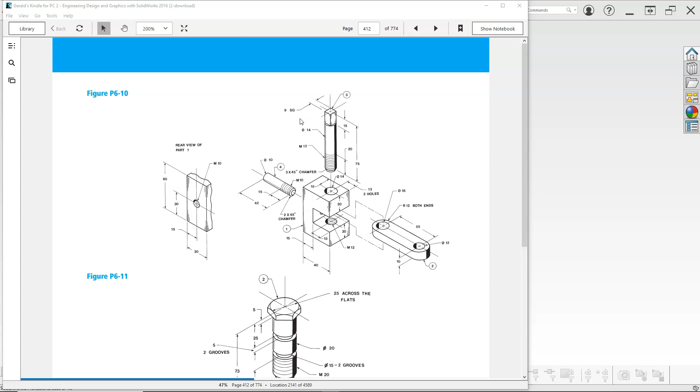Top down, justification for doing a top down might be that this is the first of about 20 sizes, and then I'm going to use top down as maybe a calculator or some type of useful geometry. So let's start with the C shape.

No real issues with our geometry, and this is in metric. So I believe we've created a metric template. If not, I will refer you back to creating the templates. So let's go ahead and we'll get started. I'm going to just go to the front plane.

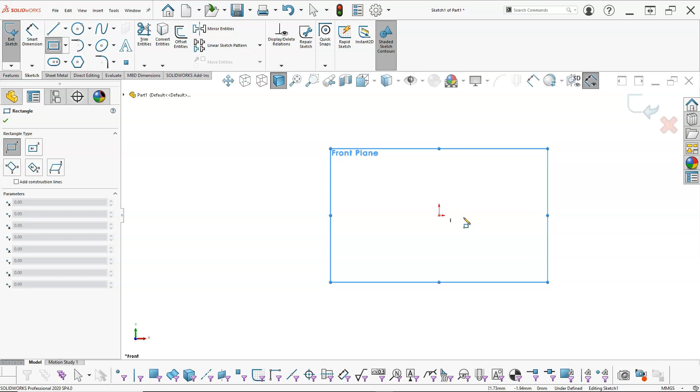There is some symmetry. I don't know as far as location what I'm really going to be doing with this. There's not really a mounting point or something to be concerned with. So I'm going to go with the corner rectangle, and we're going to attach it to the origin. And if I do the click, then I'm just going to bring it out to that side.

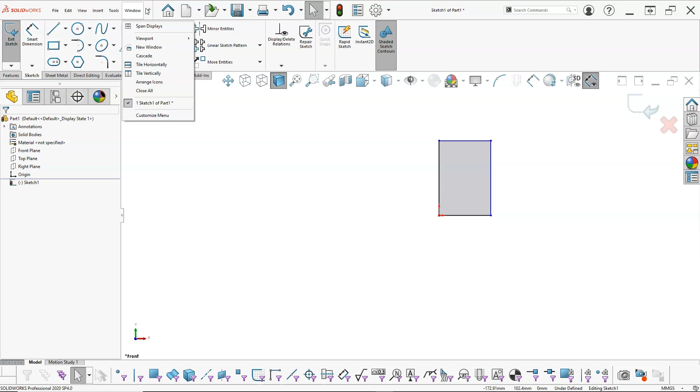So there's a tool under Sketch Tools. So going over to the Tools pull down, and if you haven't hit the little push pin, if you see the little arrow over here next to SolidWorks, you're going to expand out, hit the push pin, because I do kind of like to have those available.

And then under Sketch Tools, there's a tool called Jog Line. I don't get to use that very much, but it is kind of handy at times where when you pick on the line, it's going to start to drag out and create that shape. Now I could have just as easily have sketched all of that, and it really wouldn't have been that big of a deal.

So our decision, we have 20 on the top on the 2 legs, the top and the bottom, and the gap. I got to find my overall. So 20 and 20, and we're not really given an overall. So the assumption would be that this is going to slide in and be fairly close. So if we're looking at a gap tolerance, we could go to the dimension of 10.

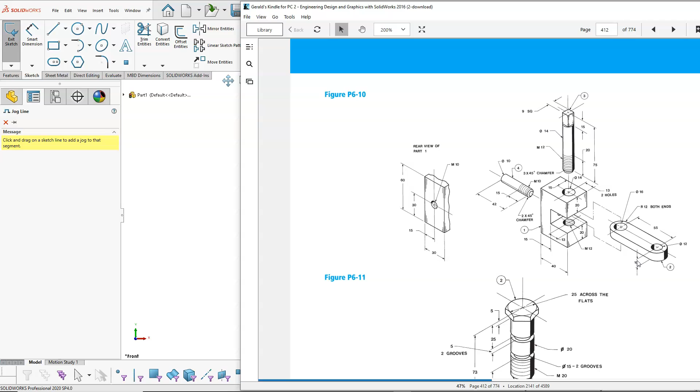So that would be another one of those we'd want to verify against an actual part, or look at our downstream data of what this ultimately is going to do. So that's going to drive some of my dimension choices. And let's see, we are still in the jog line. I'm trying to figure out why I'm not getting my end context.

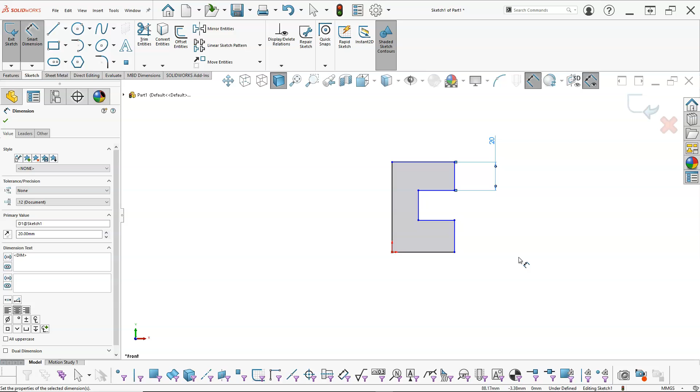Alright, so we're in the smart dimension. And one more. Let's see if this is coming up now. No, I'm not seeing. I noticed another dimension strategy, but that may have been something that we're going to review in 2021 SolidWorks. So I'm just going to do the stack up, and that way if this needs to change, they can be individual. I'm not worried about it kind of squishing there.

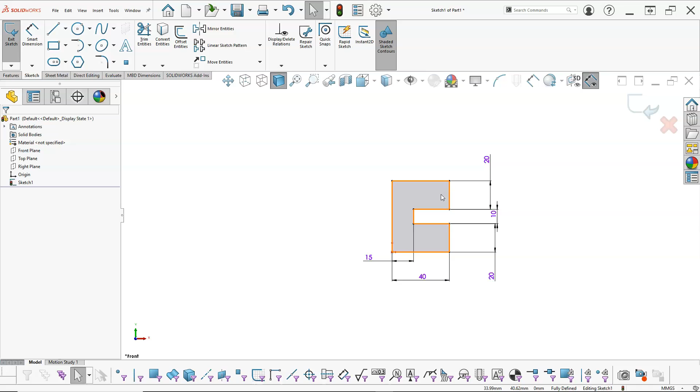So we have an overall of 40, and our depth, well, to the center of the hole, there we go, 15. And that gives us our gap. Now their gap looks a little bit wider, like it would be 20, but since it's not called out, or I'm not seeing it, I have to make a decision about the actual functionality of this part.

So let's go over into the features, extrude, and I would like for this to stay centered, so I'm going to go to mid plane. You can use blind end condition taking it backwards or forwards, pretty much whatever your preference. We have an overall width.

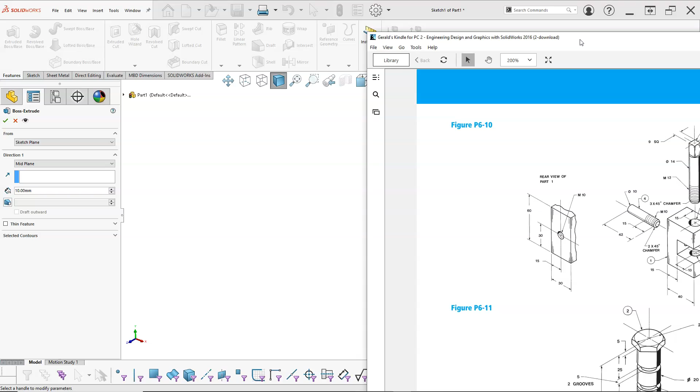Well, again, I don't see that dimension, but since the hole is at 15 millimeters, we can probably, maybe on the back of the part, the rear view has the 30, and then 30 to the top. So, and there's my 60. So that answered that question. So they hit it. So still in the command, so I can't make that change. And double click so that everything's highlighted. When I hit the 30, hit enter, that's going to go with the group.

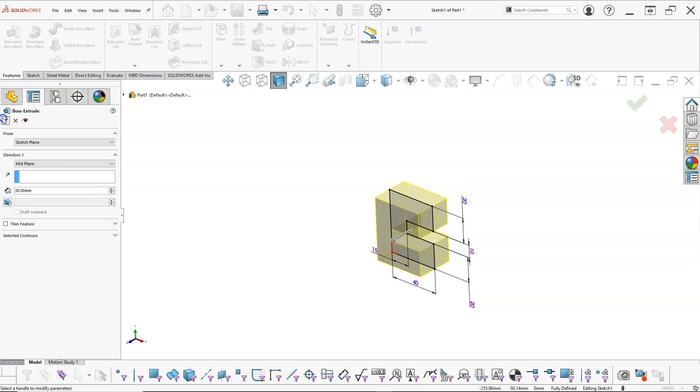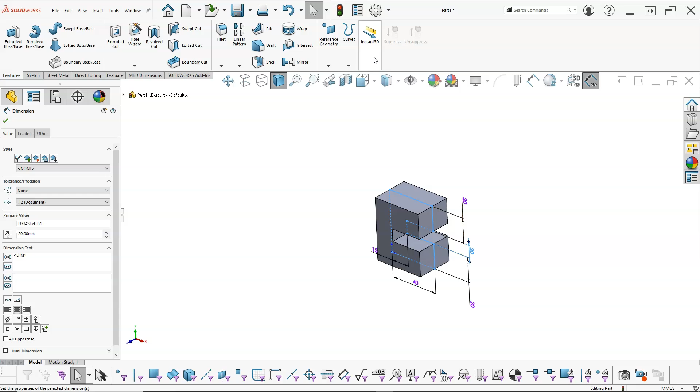So we verified, came to the view that had the correct dimension in it. So that would probably not be good at 60, but if we do want to change it, I need to double click on the dimension, put in the correct value, and then we'll perform a rebuild. That'll allow it to adjust. Alright, so our next piece of geometry, let's go with the top, and I'll use the hole wizard, so S key.

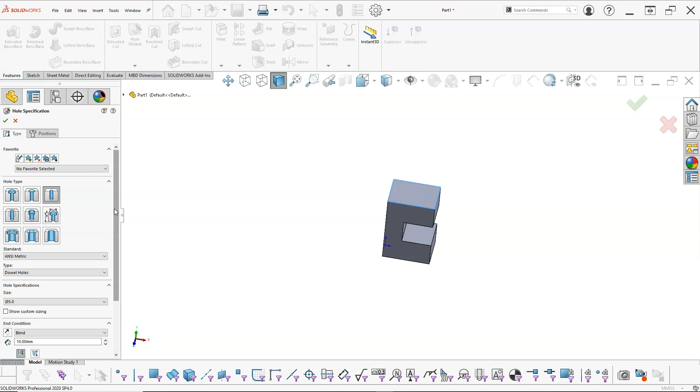And I really should get in the habit of using the S key more, but there's also that trade-off of finding out where the other items are.

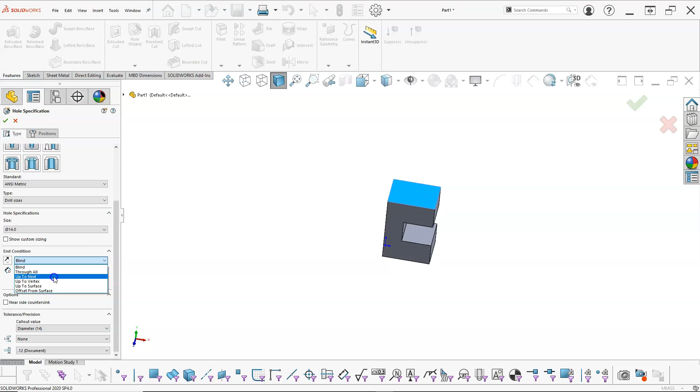So we're going to go with a 14 millimeter drill size, and we'll scroll down to 14, and its condition can be up to next, so it will stop at this next face.

Alright, and since I pre-selected, I should not see a 3D sketch. Now rotate it over into the sketch. I'll just rotate a little bit so I can make sure I have the correct perspective. 13 millimeters off of the front face.

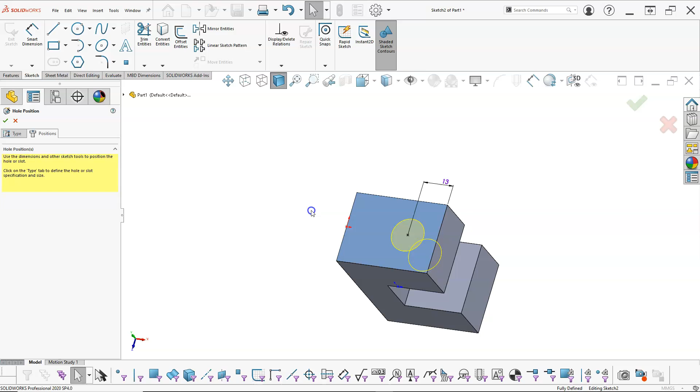And since it's centered, if I always want it to be centered rather than placing a dimension, I'll pick the point and then control select the origin or the midpoint, and we'll make those horizontal. Again, long leg is horizontal, short leg is vertical. That's how we'll create our position.

For the threaded hole on the bottom that makes the intersection, let's go ahead back into the hole wizard. And this shows as an M12, so we'll pick a common thread form, metric, tapped hole. Let's go ahead and scroll down a little bit.

And as these numbers get bigger, remember that the second number is the pitch. So a 1.25 is a finer thread than a 1.75. So for what this is doing, I think we would be safe with a coarser thread, so 1.5 or 1.75. I think 1.75 is fairly common.

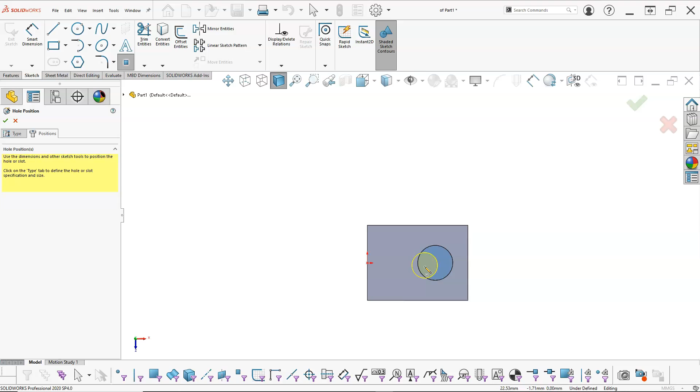Tap drills and diameters, thread call out. We can add the thread class, which would be the ANSI 2B. In the ISO it would be the G and H. So when you see those designations, those relate back to the standard and how accurate the thread is going to be. So let's go ahead and accept.

All right, so I need to do a hole wizard without pre-selecting. So we have an M10 on the back. So if I don't pre-select that face, I hit the S key, go right into the hole wizard.

And again, if you don't want to use the S key, hole wizard is up here in the command manager, and it's located a couple other places too. So find the one that you're most comfortable using. And if I get you into the habit of using the S key, you'll probably use it more than I do for the features and some of the other items.

All right, so we are at the hole specification, an M10. Sorry, let's go with an M10 by 1.25. And we look down through, we have our class of fit. Don't have to deal with too much else.

And so if you see this 3D sketch, since I didn't pre-select, it's asking me, do I want to go into 3D sketch? And sometimes, rarely, I would not recommend 3D sketches if you can find a planar surface. It's a lot easier to control, a lot less confusing. But there are places where 3D sketches are handy, and we'll try and find one of those.

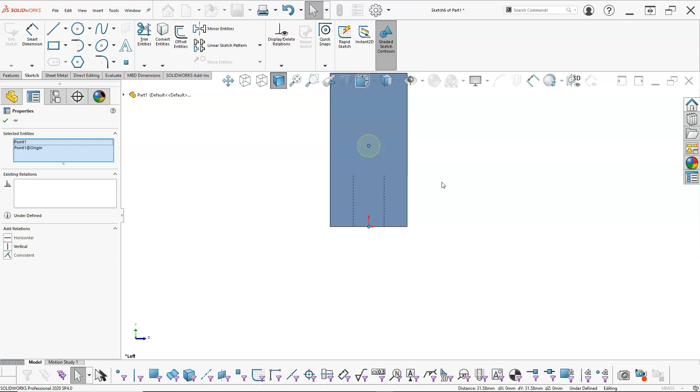So again, select and control select for the hole center and the origin, and this time long leg is vertical. Notice that this is a little darker bolded, so that's giving me my geometry. I have a couple of options here.

We could draw the center lines. I could relate to the origin, or I could put the dimensions on. If this is going to change or have some variation, I might just go ahead and dimension. But let's use the relations.

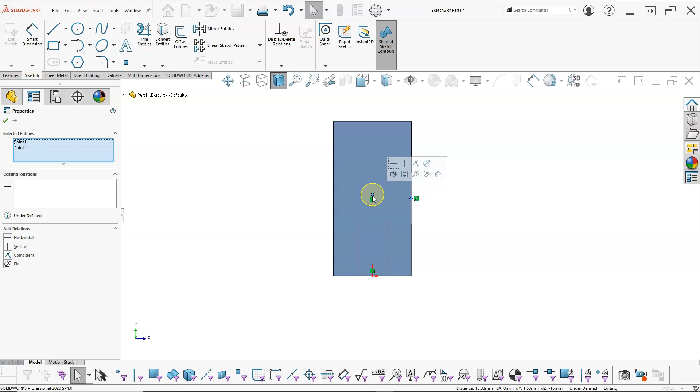So the origin to the center point, we'll make that vertical. And if I want it to stay at the midpoint, I can right-click. Let's do that again. Right-click, select midpoint, and then select the hole location. Make that horizontal. So I can create a sketch with no dimensions that is fully defined just based on the relations. And if this grows or shrinks, that hole will always stay centered on the part.

So let's go to Control 7 for the isometric, and we need to save this. And I'll find my way back to my folders.

And this is going to be, we need a new folder. So P6-10. And this is going to be my C bracket. And again, naming is kind of up to you.

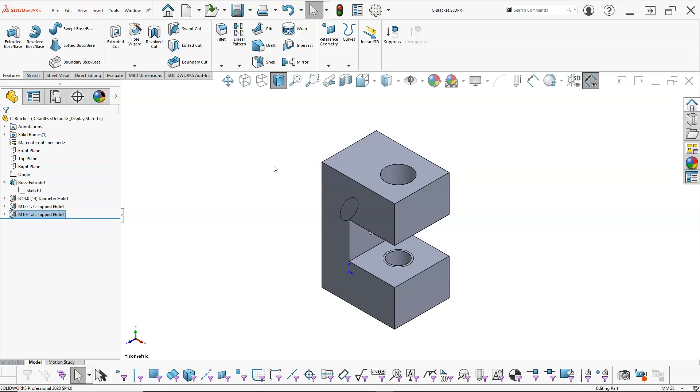I hesitate to use part numbers in the file names because it makes it very difficult to relate to on a general quick look. This is what I need. It just depends on the organizations that develop their internal standard. So we're going to go ahead and stop this video and then go on to the next part.